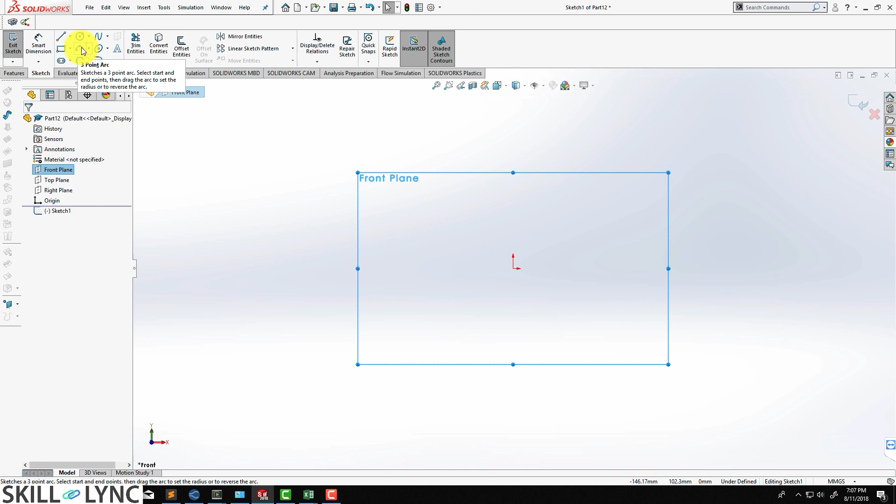Next, we are going to get started with a 3-point arc. So let's click here, here, and here, one above the origin and the other below the origin. Let's select the center of the lower arc and the origin and click on make vertical. We are going to do the same thing for the upper arc as well.

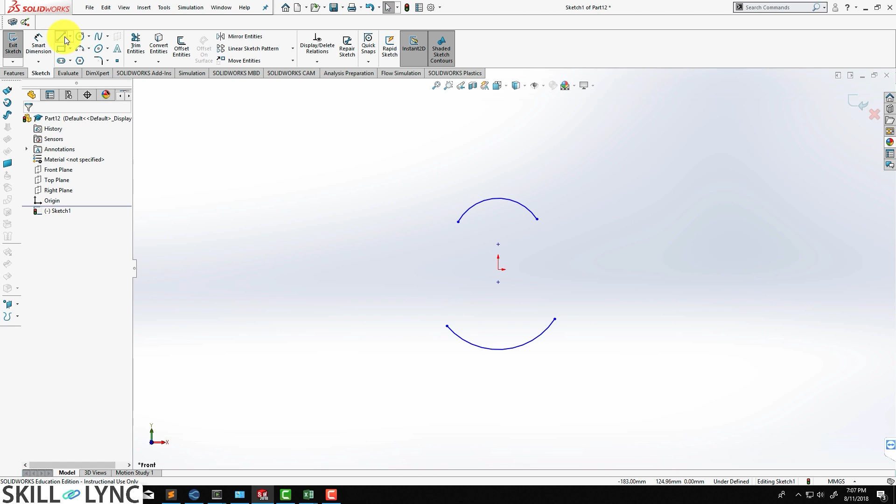Next we are going to be drawing two lines, one from here to here and the other line from here to here. Next we are going to select this point and this point and hit make horizontal, and we're going to do the same thing for the bottom 2 points as well, and then let's click OK.

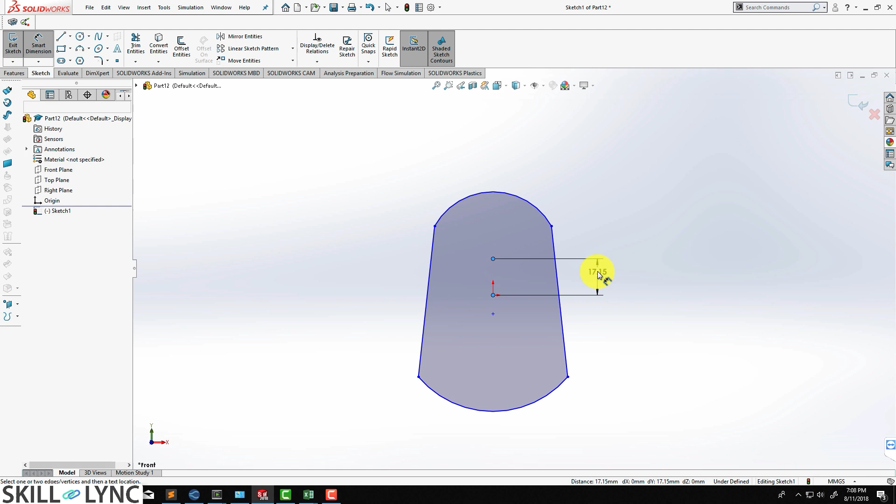So now we are ready to set the dimensions. Use the shortcut key S, click on smart dimensions, select the first circle, select the center of the first arc and select the origin, and then type in a value of 45 millimeters.

Then we are going to set up the total horizontal distance for the first arc as 80 millimeters, and then the length for this particular line is going to be 120 millimeters. Then we are going to select both these 2 points and type in a value of 60 millimeters.

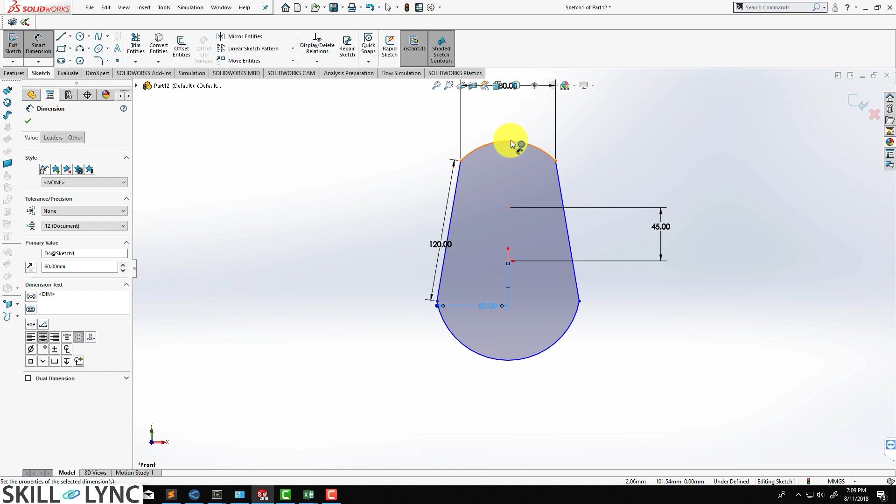Finally, we have to give the radius for the upper and lower arcs. So for the upper arc, we are going to provide a radius of 50 millimeters, and for the lower arc, we are going to type in a value of 65 millimeters for the radius. So now you can see that the sketch is fully defined, so we can exit the sketch.

Now we are ready to extrude this particular sketch. So let's select this guy and type in a value of 20 millimeters and then click OK.

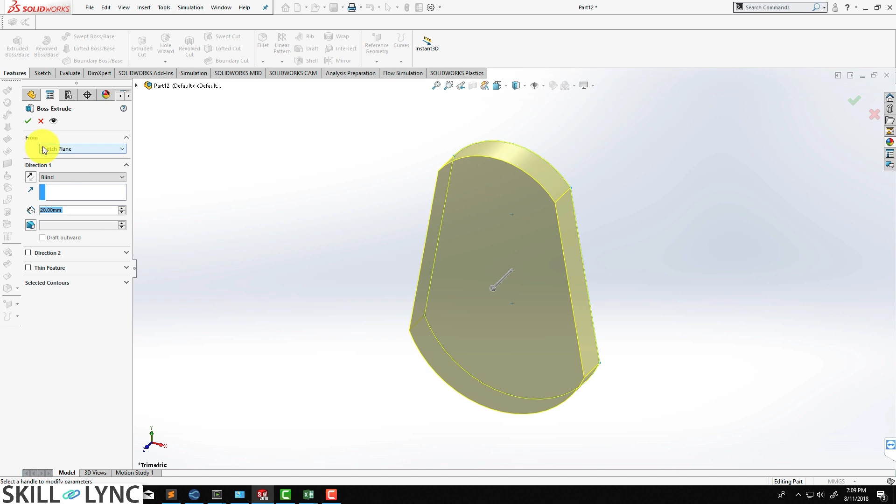So now we are going to select this particular face and start a new sketch. Use Ctrl+8 shortcut to see it correctly. And we are going to start by creating a circle. This is where the connecting rod is going to be mounted. Click on yes, use the circle tool and click and drag it out.

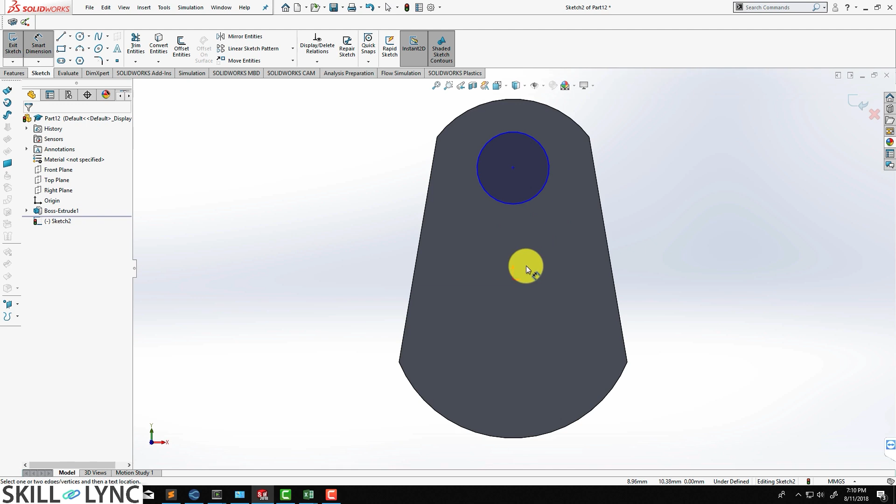Now we are ready to provide the dimension. So let's first select the origin and center of the circle and type in a value of 50 millimeters. And for the circle, let's provide a diameter of 43.75 millimeters. Then let's apply a vertical constraint for the line coming between the center of the circle and the origin.

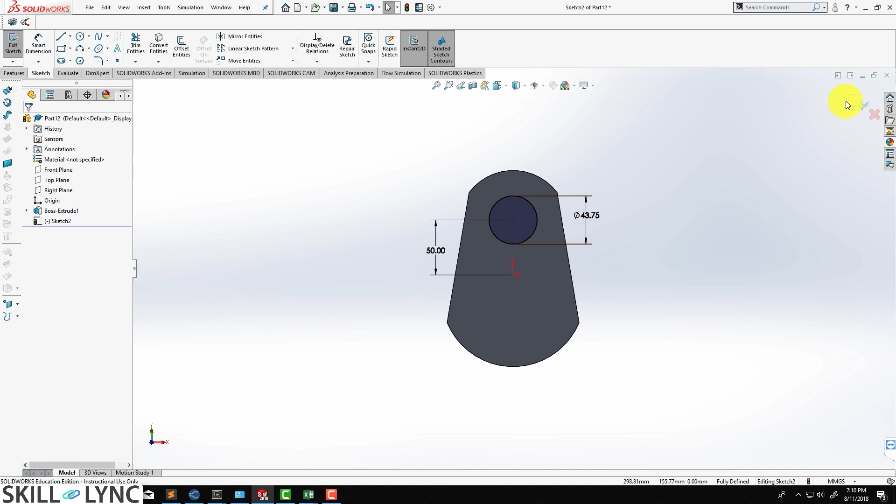Now let's exit the sketch and we are ready to extrude this particular circle and type in a value of 16 millimeters, and we can click on OK.

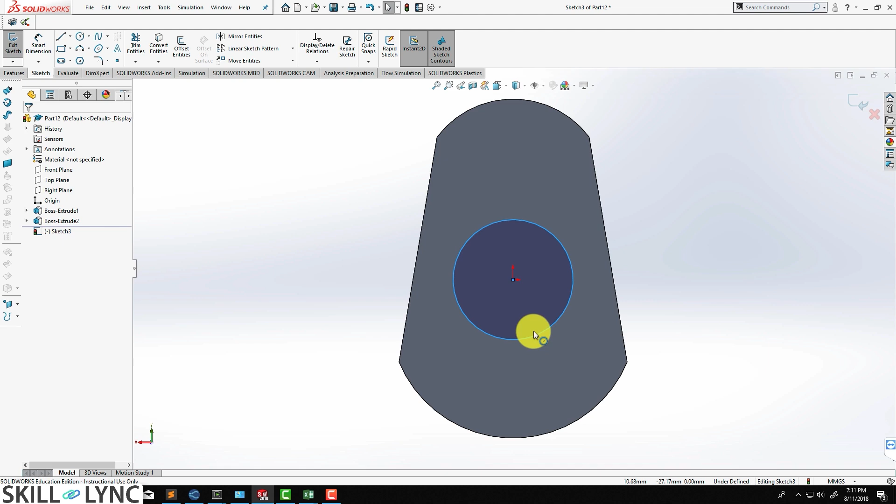Now on the back side, we are going to create a new sketch and hit Ctrl+8 to start creating the sketch. We are going to get started again with the circle tool, click the origin and then just drag it out, and let's assign the diameter of the circle to be 35 millimeters. Let's click OK, and then we can exit the sketch, and then use extruded boss base and type in a value of 20 millimeters.

Let's click on OK. So next we are going to be applying fillets to the 4 corners of our crank. Right now the fillet can be done through the sketch or also on the 3D part. So let me show you how to do it via the sketch.

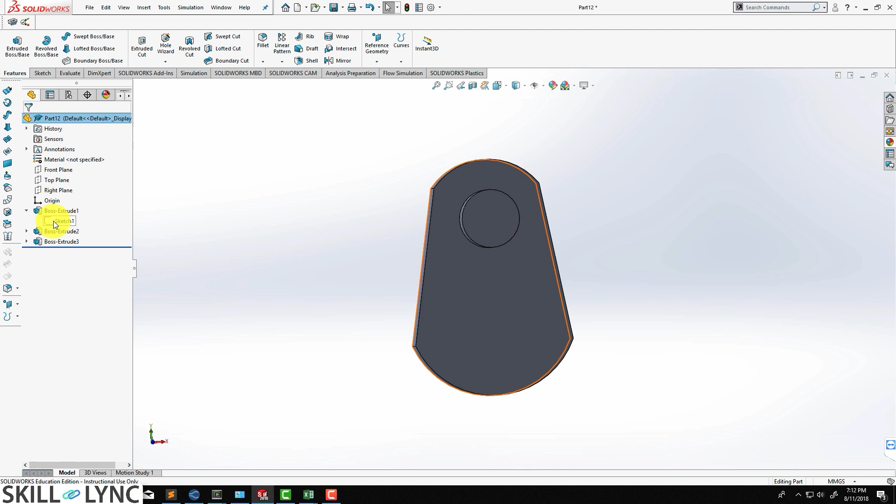So let's click on edit sketch and use Ctrl+8 to view it correctly, and then use the fillet tool. We are just going to select this corner, this one, and also the bottom 2 corners, and type in a value of 25 millimeters for the fillet radius and then hit OK. Now we can exit the sketch.

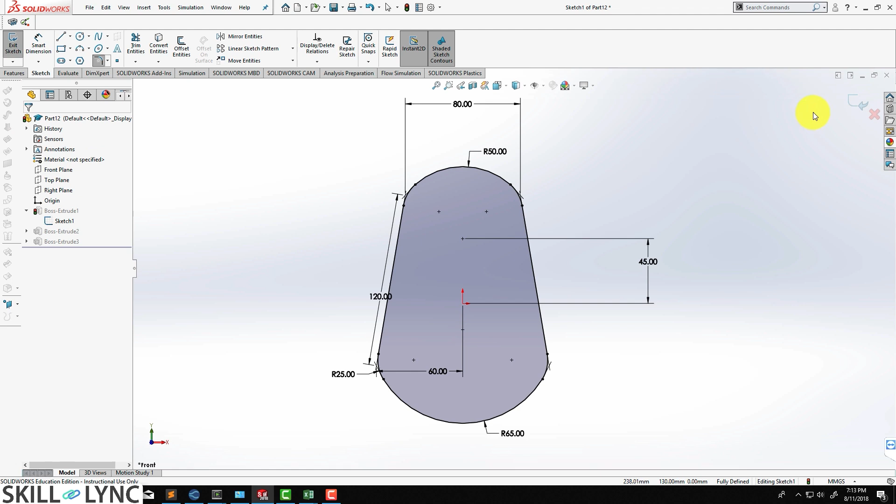So now we are going to select the right plane to create a new sketch that will help us cut the crank in a desired way. So we are going to be using a 3-point arc for doing this cut.

So let's select this as our first point, the second point, and the third point somewhere here. Hit escape, and now it's time to assign dimensions for this. So let's select this guy and this guy, and let's type in a value of 4.87 millimeters, and we're going to provide a vertical dimension of 35 millimeters.

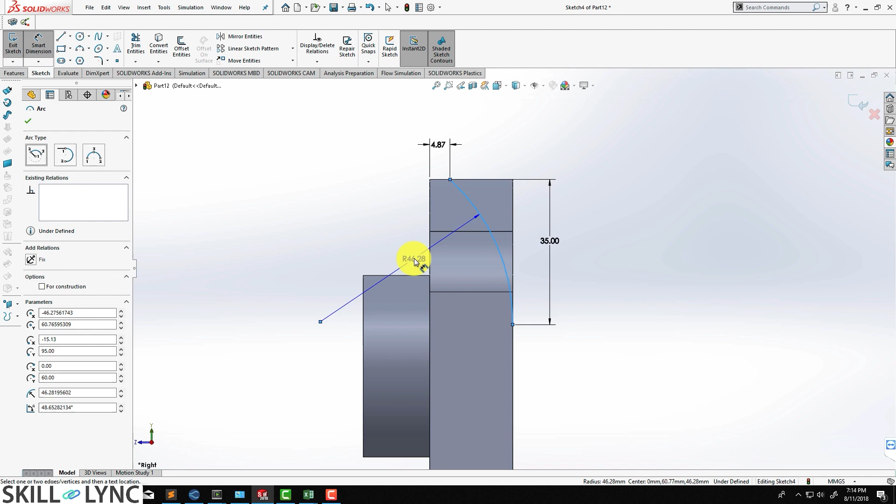For the radius, we are going to type in a value of 50 millimeters. Click OK, and we are going to do the same thing at the bottom of the crank as well. Let's go to 3-point arc one more time. Click here, and let's click here and then here.

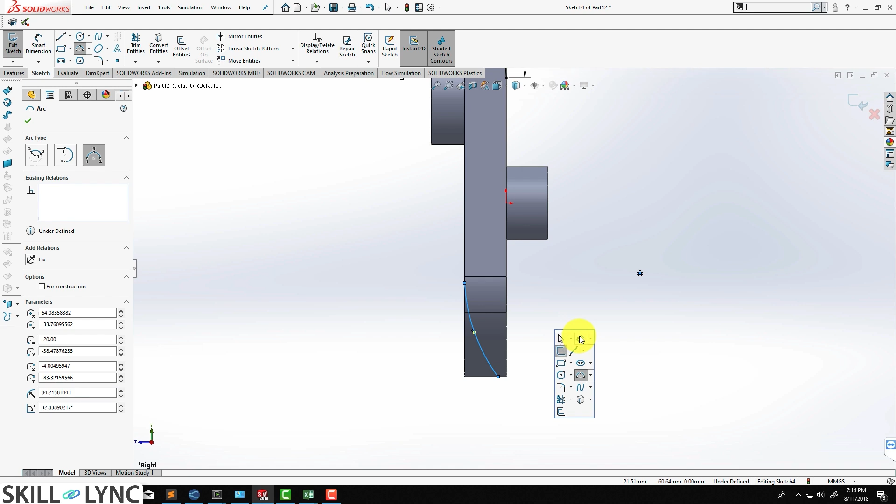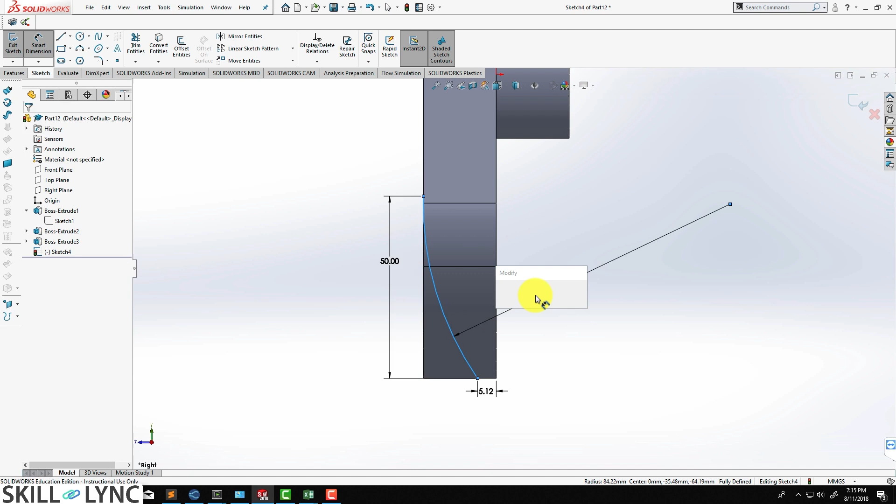So let's now assign the dimension. Let's select this corner point and this point, and type in a value of 5.12 millimeters. Now let's select this point and apply a vertical distance of 50 millimeters. Finally, we are ready to assign the radius value for the second arc, which is going to be 120 millimeters.

Click on exit sketch, and then we are going to do an extruded cut operation. Make sure that you select flip side to cut, and instead of using the blind all option, we are going to use through all both, so this way the cut is complete on both sides. Then click OK.

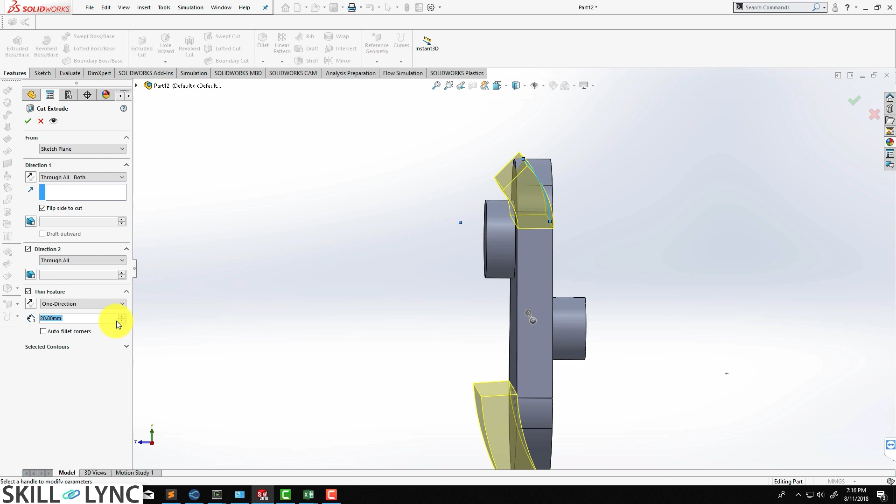Looks like the sketch contains more than one open contour, so we need to make sure we edit the sketch. What I'm going to do is use the thin feature option here, type in a value of 20 millimeters, reverse this particular direction, and then click OK to see if this works.

Looks like I did something wrong. So maybe what I'm going to do is select this again and just flip it. But it looks like if you flip it, one side works, but the other side doesn't cut correctly. So I think we need to re-examine our sketch.

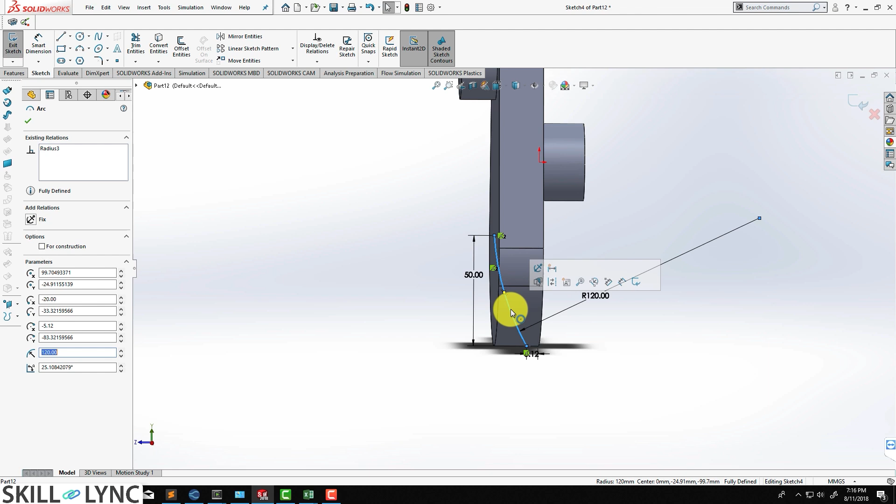Let's go back to sketch edit, and let's delete this, exit, and then try doing the extrude cut only with the first sketch. Alright, so let's make sure that we select through all both, and let's click OK. Alright, so that is complete.

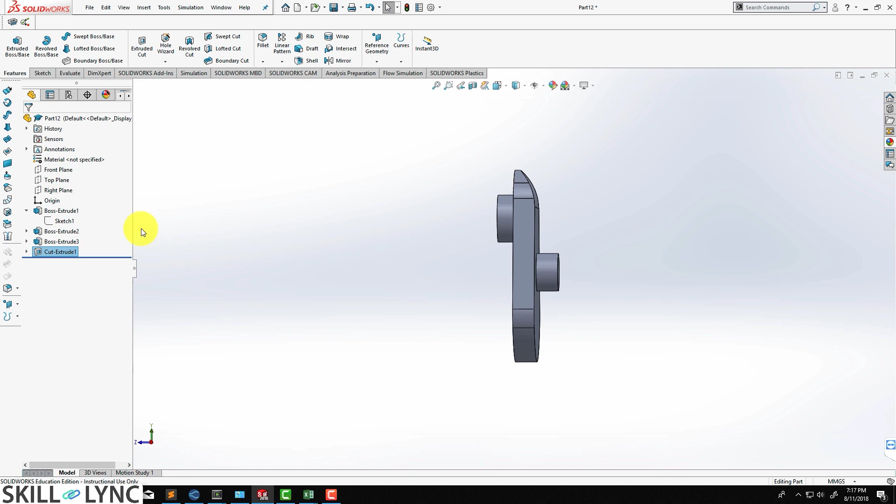Now what we are going to do is recreate the sketch in the right plane and hit Ctrl 8 to view it correctly. Let's quickly recreate the 3-point arc as we did before, so we'll select maybe this point first, this point, and then this point.

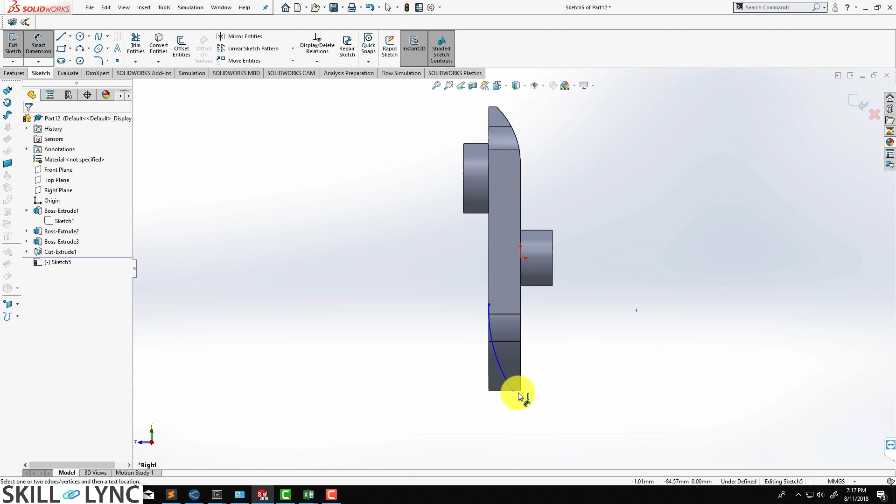As we did before, we are going to apply the dimensions. So sometimes you have to do these types of things, right? The idea is maybe sometimes the order of operations doesn't work out correctly, so make sure you go by creating the feature one by one if things don't work the way you want.

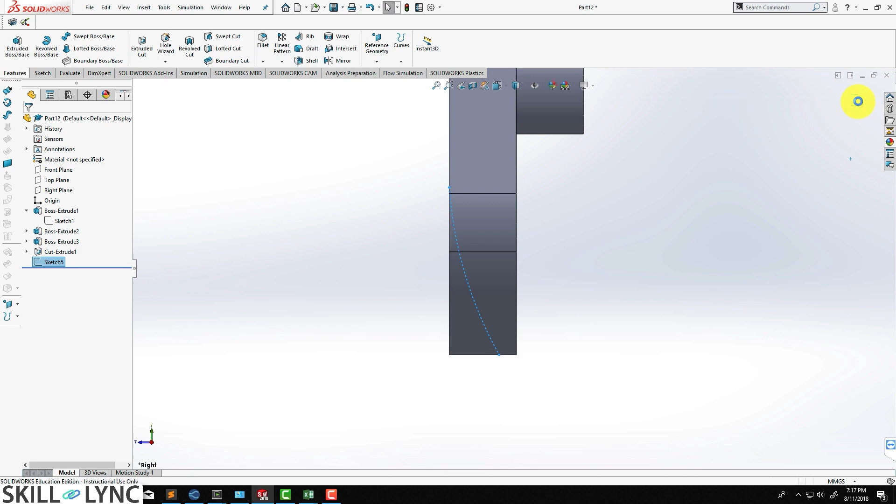So let's apply a vertical distance of 50 millimeters, and then type in a radius of 120 millimeters for the arc, and let's exit the sketch and try using the extruded cut operation one more time.

We need to make sure that we select through all both, and then let's just flip that side in which material needs to be removed, and then let's click OK. There you go. So now this is what I wanted to achieve before, but for some reason we had to go through this one by one.

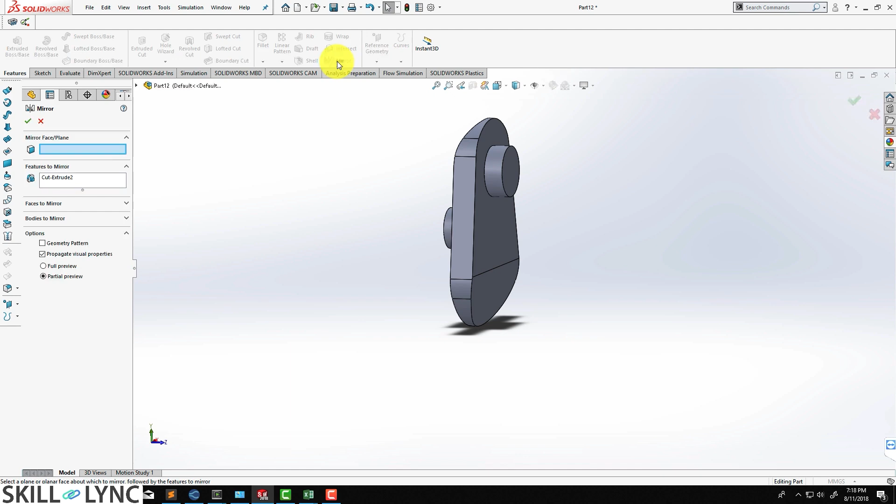Now this is just one side of the crank. To create the other side of the crank, we can just mirror this. So let's use the mirror tool, and we are going to be selecting this circular face about which the mirror operation is going to be created.

For bodies to mirror, what we are going to do is select this entire body that we have created so far, and you can see the preview appears. Make sure that you select full preview and then click OK. There you go, so that's how we create the crank.